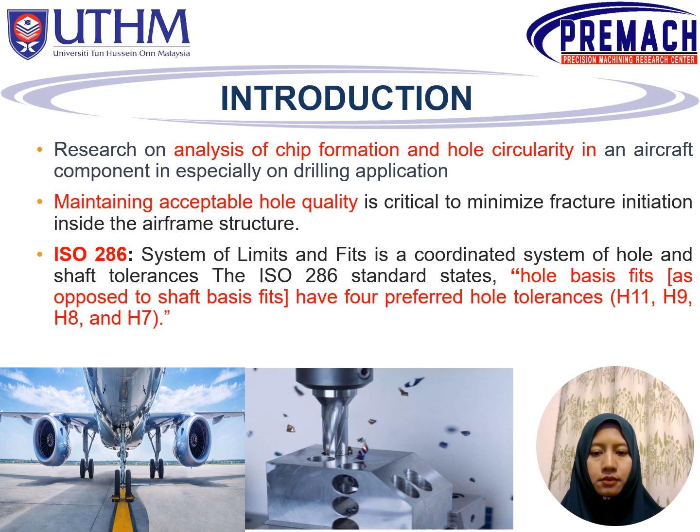My focus lies in investigating the factors influencing hole circularity, specifically in the context of chip formation and hole circularity in aluminum 6061 alloy. Achieving a high-quality hole with minimal dimensional variation is of paramount importance, as it not only optimizes productivity but also reduces manufacturing costs and time, by understanding the key factors impacting hole quality in aluminum 6061 alloys such as cutting parameters, tool geometry, and metal properties.

One of the challenges in achieving optimal hole quality is the requirement for human labor to monitor the machine status regularly. This monitoring process demands a significant amount of time and energy, which can lead to inefficiencies and potential errors. Therefore, my research aims to explore automation and monitoring techniques that can alleviate the burden on human operators and reduce the need for continuous manual intervention.

Despite the significance of hole quality in the manufacturing industry, there remains a shortage of studies specifically addressing hole quality in aluminum 6061 alloy from the perspective of chip formation and hole circularity, as aluminum 6061 is widely used in aerospace, automotive, and other industries due to its favorable properties.

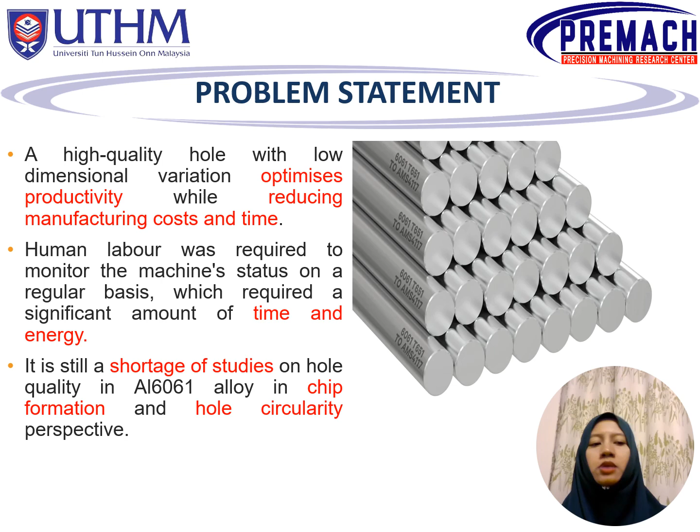My research focused on conducting drilling operations on aluminum 6061 aircraft materials and exploring the influence of feed rate on hole circularity and chip formation, as aluminum 6061 is a commonly used material in the aerospace industry due to its mechanical properties. By carefully controlling the feed rate during drilling, we aim to analyze its impact on the circularity of the resulting holes and the formation of chips.

This will provide insight into the optimal feed rate for achieving high-quality holes in aluminum 6061 material, ensuring the structural integrity of aircraft components. Additionally, our research involved studying the effectiveness of machining operations in CIMCO software on hole circularity during operation times.

This software enables precise control of machine operation. By examining the machine operation parameters, tool path, and cutting strategies implemented through Cimco software, we aim to evaluate the influence on hole circularity, which will help in optimizing the machining process and identifying any potential improvement or adjustment required in the software settings to enhance the quality in aluminum 6061 aircraft material.

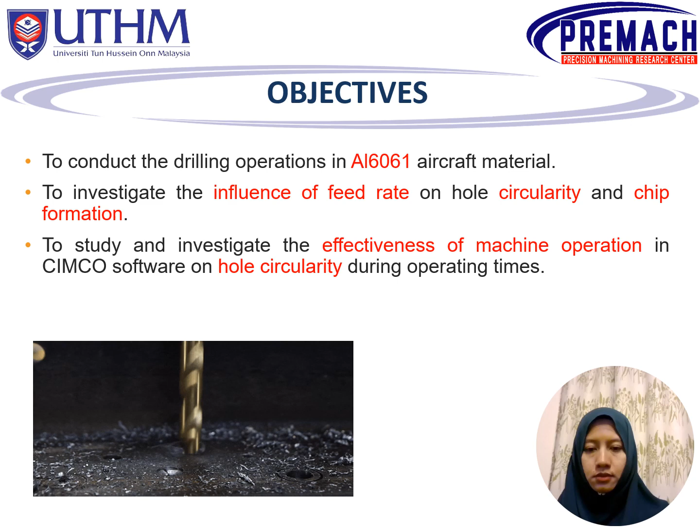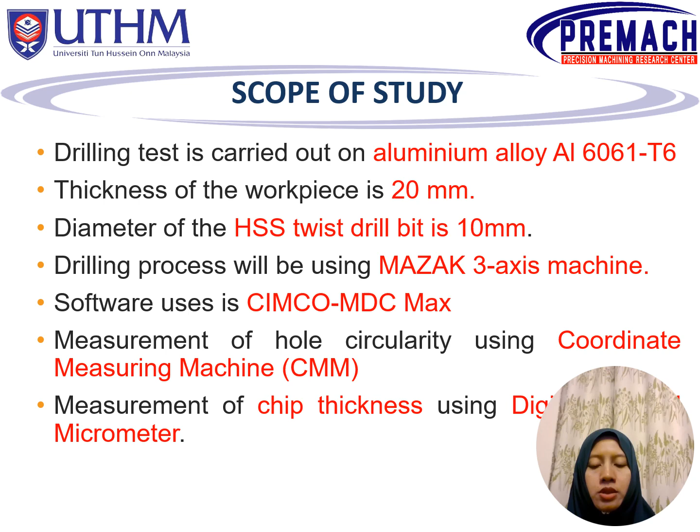The scope of the study encompassed conducting drilling tests on the aluminum alloy 6061-T6 with a workpiece thickness of 20 mm, an HSS tool with a 10 mm diameter, and the Mazak 3-axis machine for the drilling process, and the software used is Cimco MDC Max. To measure the hole circularity we use a coordinate measuring machine, CMM, and for the chip thickness we're going to use a digital pointed micrometer.

Hole circularity is a crucial aspect in the evaluation of drill holes, as it quantifies the deviation of a hole from a perfect circle. Geometric tolerance in 2 dimensions allows for the assessment of this deviation, considering the measured circle within a specified tolerance zone formed by 2 concentric circles.

The circularity error, which is the difference between maximum and minimum diameters of the measured circle, is used to determine the extent of circularity deviation. By calculating the circularity error as Rmax minus Rmin, the magnitude of the deviation from a perfect circle can be quantified. Understanding and analyzing the circularity error provides valuable insight into the quality and precision of drill holes, aiding in the optimization of the drilling process and ensuring adherence to required dimensional specifications.

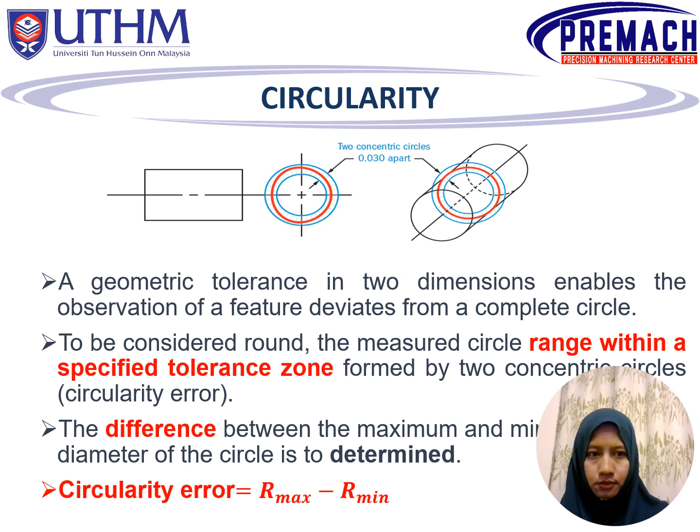In the field of metal cutting, chip formation refers to the process of generating chip structures in the formation zone during machining operation, as mentioned by Astakhov in 1997. Chips are formed as a result of the shearing action between the workpiece and the cutting edge. Understanding chip formation is crucial as it plays a significant role in determining the success of machining operation. The type and characteristics of the chips created during the machining process vary depending on factors such as cutting parameters, tool geometry, and material properties.

By studying and analyzing the different types of chips that are typically formed, researchers can gain insight into the machining process, optimize cutting conditions, and improve chip evacuation mechanisms. This knowledge contributes to the enhancement of machining efficiency, surface quality, and tool life, ultimately leading to improved productivity and cost effectiveness in manufacturing processes.

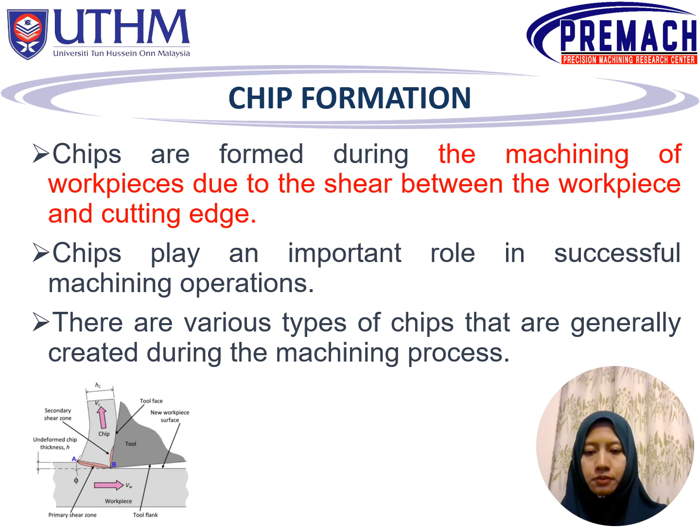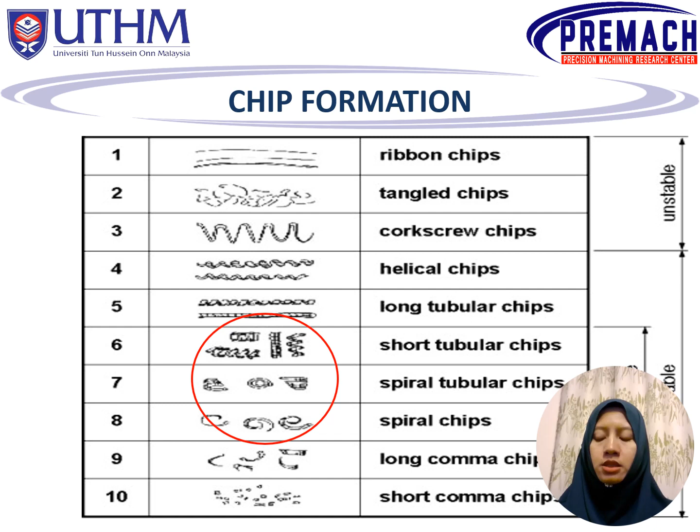In the context of drilling operation, various types of chip formation can occur which exhibit distinct characteristics and influence the overall drilling process. We have stable and unstable chip formation. The stable chip formation is divided into 3: short tubular chips, spiral tubular chips, and spiral chips. And these 3 were consistent in terms of shapes.

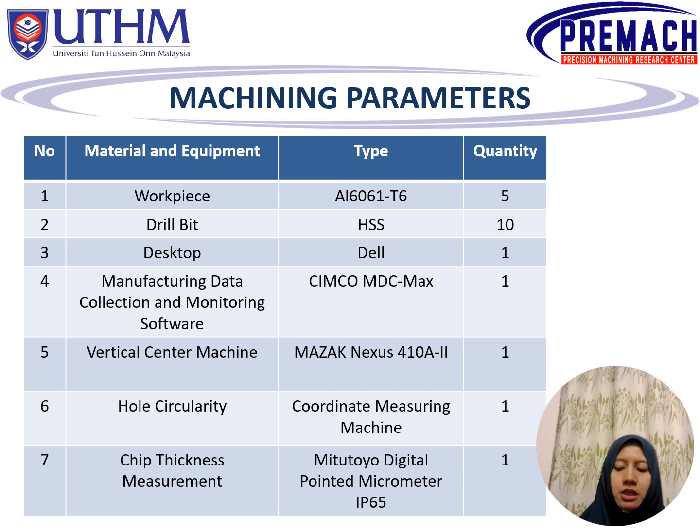On the methodology, we are using 5 workpieces of aluminum 6061-T6, 10 drill bits of HSS, and 1 desktop from Dell. The manufacturing data collection and monitoring software is CIMCO MDC-Max, with the vertical center machine Mazak Nexus. And to measure the hole circularity, we are using a coordinate measuring machine, CMM, and for the chip thickness measurement, we will use a Mitutoyo digital pointed micrometer IP65. These are the equipments that are being used, and this is the experimental setup.

For the result and analysis of the hole circularity, it indicates that the circularity error of the drill holes increased as the feed rate was increased. At the low feed rate of 0.1 mm per rev, the highest circularity error observed was 0.066 mm, while at the high feed rate of 0.36 mm per rev, the highest circularity achieved was 0.085.

This trend aligns with previous research, suggesting that the increase in circularity may be attributed to the rise in cutting forces. As the feed rate increased, the deflection and vibration of the workpiece intensified, leading to accelerated penetration and enlarged circularity defects. It is worth noting that the obtained data for hole circularity exhibit instability and inconsistency, with the highest circularity value found in hole 29, possibly due to tool wear.

Hole 28 had the lowest feed rate, and in terms of feed rate, hole 23 exhibits the highest value, while hole 18 had the lowest value. This observation highlights the influence of both circularity and feed rate on the quality and stability of drill holes, with the highest feed rate recorded as 0.36 mm per rev.

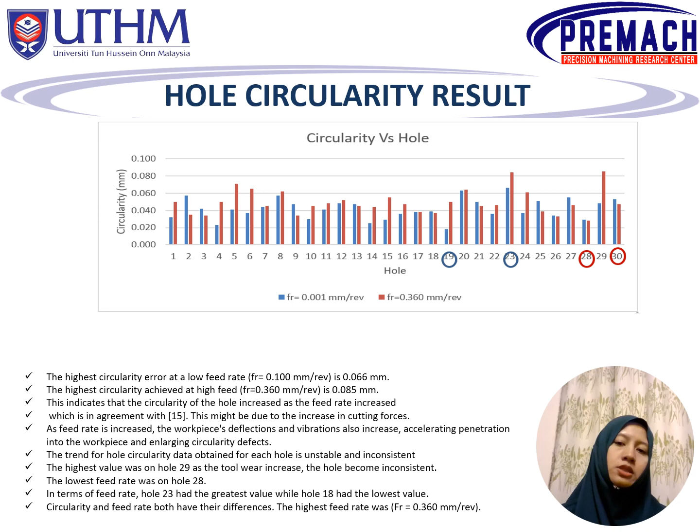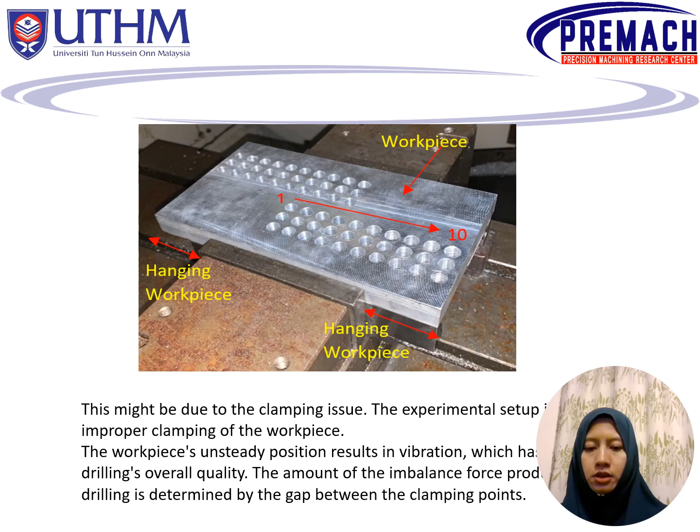The deflection of the beam in a particular direction when force is applied to it is known as beam deflection. The beam can be bent or move away from its original position. This distance at each point along the member is the representation of the deflection. And for the chip formation, these are the chip formation results for holes 1, 15, and 30 that were gathered and recorded.

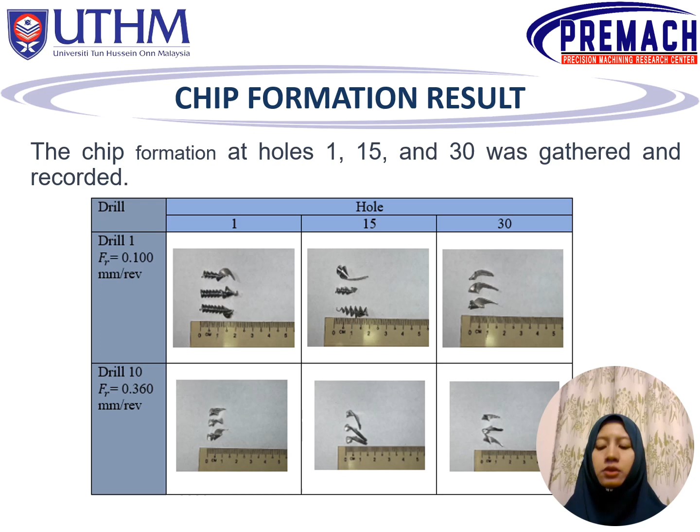The chip thickness result analysis reveals that the chip thickness is significantly influenced by the feed rate, showing a non-linear relationship. As the feed rate increased, the chip thickness also increased, indicating a positive correlation. However, it is noted that at higher cutting speeds, the chip thickness decreased, suggesting a more complex interplay between feed rate, cutting speed, and chip thickness. The non-linear nature of the relationship highlights the need for further research to fully comprehend the underlying mechanism.

This finding has implications for optimizing cutting parameters in metalworking and machining processes, emphasizing the importance of considering the feed rate and cutting speed to control and optimize chip thickness. By understanding and manipulating chip thickness, manufacturers can enhance machining efficiency, surface quality, and tool life. The observation that chip thickness decreased at high cutting speed aligns with previous research, further supporting the need for continued investigation and analysis in this area.

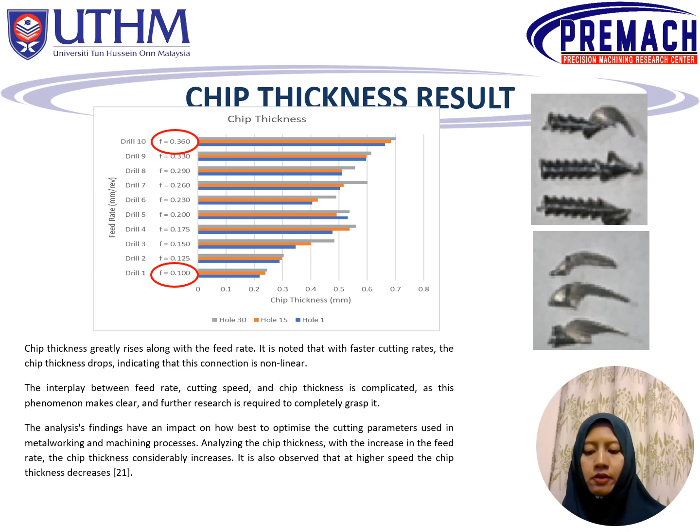On the relationship between circularity and chip formation, drill 9, operated with a feed rate of 0.32 mm per rev, exhibits the lowest hole circularity compared to the other drills in the experimental setup. This is attributed to the production of small and segmented chips during drilling. The presence of small chips indicates excellent circularity error, as these chips help prevent tool wear and prolong tool life.

Additionally, the segmented chips, which break into conical helical shapes before assuming long pitch form, are advantageous for chip discharge and disposal. The segmentation occurs due to the lack of ductility in the material, leading to restraint from the drill hole's wall. On the other hand, drill 5 and drill 10 produce corkscrew and tangled chip shapes, resulting in high average circularity. The presence of such uneven chip shapes adversely affects the hole quality, highlighting the importance of chip shape in determining the overall hole's circularity.

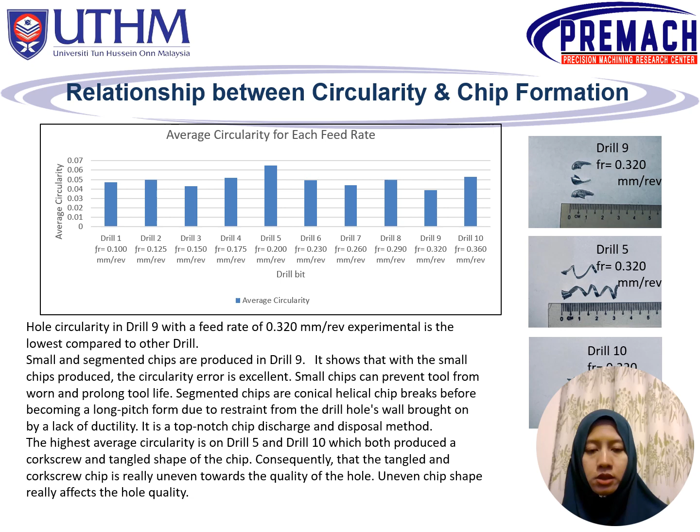And lastly, on the correlation of OEE performance and circularity, during the investigation of drill 6, it was observed that the change in shift during the production process had an impact on its performance. The overall equipment effectiveness (OEE) formula, which takes into account the good count, ideal cycle time, and planned production time, was used to assess the performance.

The issue primarily stemmed from the planned production time on the ground floor, where the changes in shift affected the OEE. This could result in height misalignment or the need for minor modification, potentially leading to decreased precision or slower operating speeds. It is crucial to maintain the efficiency of drill 6 at its peak to ensure optimal performance.

In terms of average circularity data for different feed rates, the best performance was achieved with drill 7 and a feed rate of 0.26 mm per rev. This drill demonstrated excellent machine performance, as evidenced by the low average circularity error. The efficient operation of the machine has the potential to impact the quality of the workpiece. Additionally, drill 9 exhibits high OEE performance, indicating excellent performance in terms of availability, quality, and overall performance.

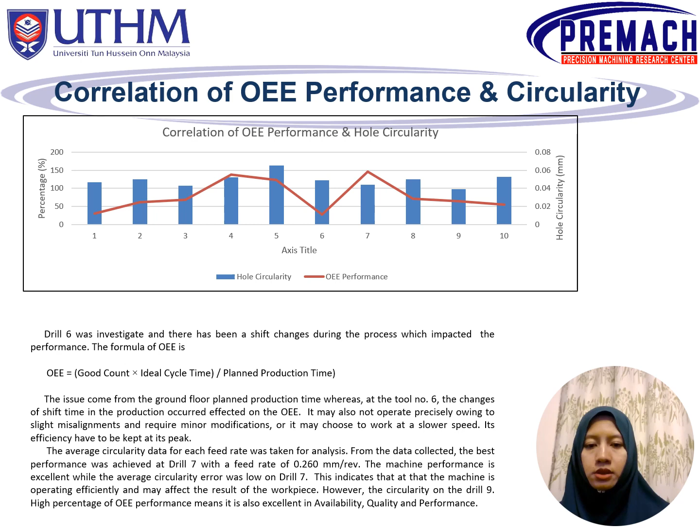The conclusion of the research is that the study reveals several important findings regarding hole circularity, chip thickness, machine performance, and data analysis in the manufacturing process of aircraft components. It is observed that as the feed rate increased from 0.1 mm per rev to 0.36 mm per rev, the circularity of the hole also increased due to higher cutting force. However, inconsistent hole circularity is observed, mainly caused by the hanging workpiece during drilling, leading to vibration and degradation of hole quality.

Chip thickness is found to increase with higher feed rate, reaching a maximum of 0.706 mm at 0.36 mm per rev, while drill 1 exhibits the minimum chip thickness of 0.22 mm. The increase in chip thickness is also attributed to rubbing and improper cutting, especially as the number of holes drilled increases. The performance of the machine as recorded by the CIMCO MDC-Max plays a crucial role in determining product quality.

By analyzing drill behavior, including speed, power consumption, and performance fluctuation, valuable insight can be gained to optimize the manufacturing process of aircraft components. Monitoring individual drill performance enables the identification of areas for improvement and ensures consistent, high-quality production standards, ultimately enhancing efficiency and reliability.